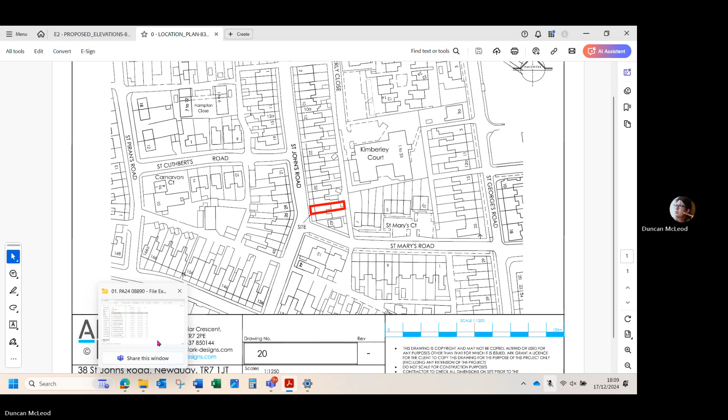We've done all this because it wasn't that long ago they added a huge big extension on the back, which would overlook the whole terrace, but we are really worried about the outside spaces and the impact.

Anything else? So what I'm going to do now is propose to close public questions and ask Duncan to present on this. I'll propose the close of public question. Show of hands to close public question.

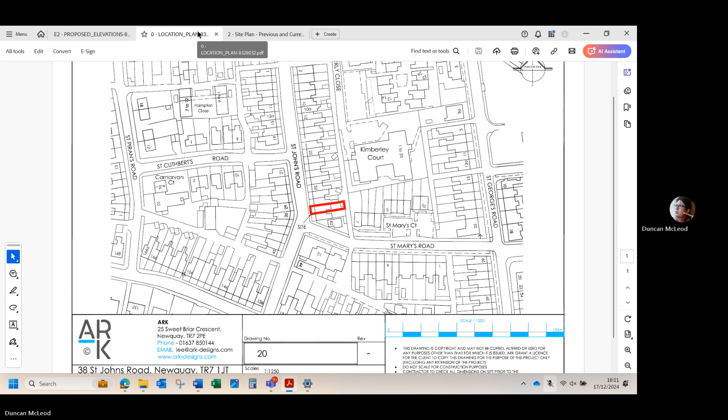So this is a new consultation. We'll start off with the location plan, showing the application site and proximity to neighbouring properties, including St Mary's Court and Kimberley Court.

When we're being reconsulted, we always ask ourselves what has changed. Firstly, whilst this is still a householder application, the applicant has changed to reflect the commercial nature of the property, so this is a company making the application rather than an individual as it was last time. Secondly, the description has been updated to better reflect the works applied for - it's much longer this time because there were more elements than referenced previously. Thirdly, the works to the rear of the property, where most of this is taking place, have been reduced to match the existing building line. We'll see from the plans that the works extended out into the back garden, but they aren't doing that to the same extent now.

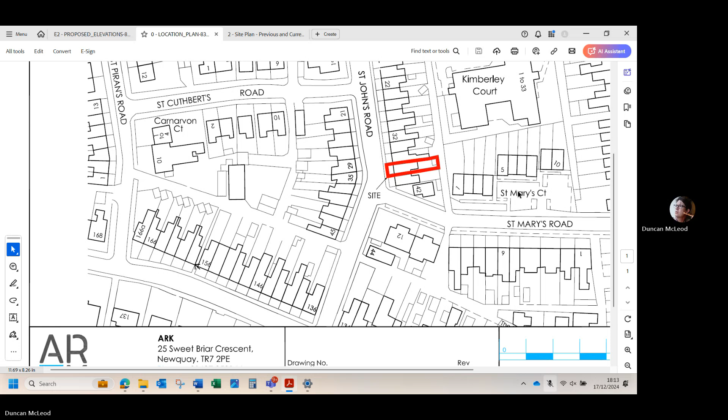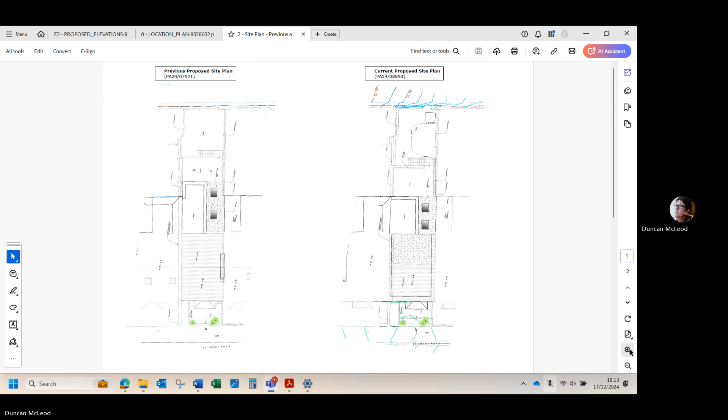I've put together a site plan of the previous application and the current one. What I want to focus on is this area here. You'll see that previously the extensions went out beyond this blue building line. Now they are not doing that.

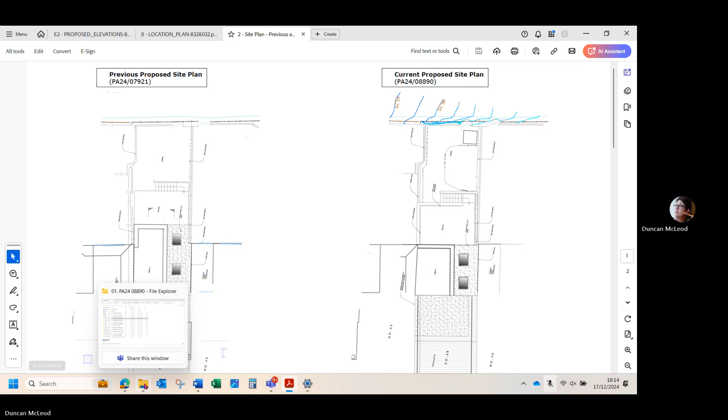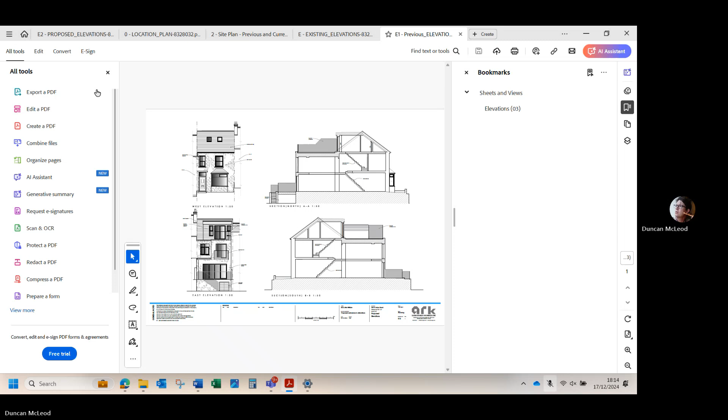We'll have a look at the elevations next. It's really the rear elevation that we're interested in. So that's the existing rear of the property, the east elevation.

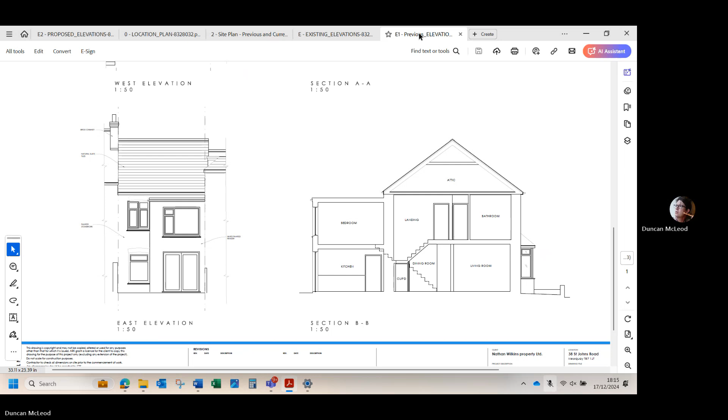Hopefully you can see that there is already an extension to the rear of the property that sticks out, which matches the building line. Previously, we were looking at the dormer at the top, the Juliet balcony, and an extension at the bottom there, which is all coming out beyond the building line.

Let's make that a little larger and focus on that rear. What we can see is that the ground floor rear extension has been extended to the full width of the building. Previously it didn't quite go all the way, and now it is. This is the rear ground floor infill extension element of the application.

At first floor, it looks like they've added about 0.5 meters to the width of this rear extension, but when I compared it with the drawings, it's just been poorly drawn, so it is just the same as before. The Juliet balcony remains unchanged.

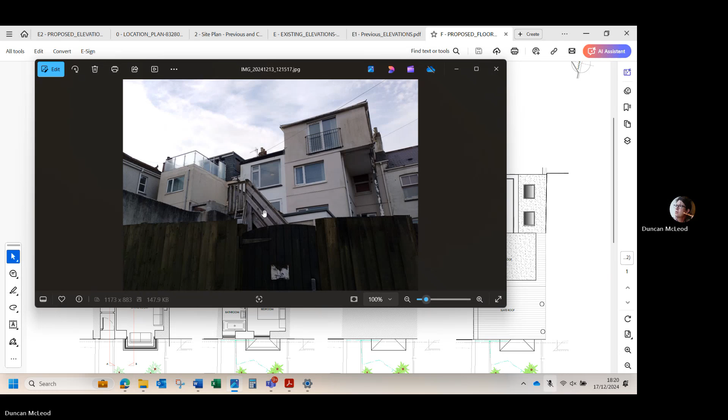Right, so there's a modest extension to this raised decking area, but that does already exist. And if I show you that photograph again, you can see this wooden structure is the steps up to what is a raised decking area. It is going to be slightly larger, but it does already exist out the back.

And you've got the infill extension, which now goes the full way across, creating a kitchen at ground floor level.

The addition of the Juliet balcony is probably the main change to the existing property at the moment. So again, let's refer to that photograph - you're looking at a Juliet balcony on this window here, and it's quite a large window at the moment already, but that will become a Juliet balcony.

This dormer, the newly created dormer, is referred to as an attic room, and this opens onto the new roof terrace that's created on top of the existing flat roof.

Yeah, I mean that's the application. It's not protruding as far out as it did last time, so it is a reduced application.

Can I ask you a question before I talk to my colleagues? Because this is actually an employment site now, we're now saying it's a business. Is that right?

Yeah, it would appear to be, and so we have policies around parking, don't we? It's our policy E2, which is new employment and training space, and our bottom line is that we encourage and applaud extra commercial sites, but it's a requirement that they do not adversely impact on the landscape or existing residential amenity. So the decision here is whether this is going to affect residential amenity, and there's a requirement to provide adequate off-street parking in accordance with the travel plan guidance, whatever that is now.

So are they providing any parking? There is no parking changes to this application - they'd just be looking at the on-street parking.

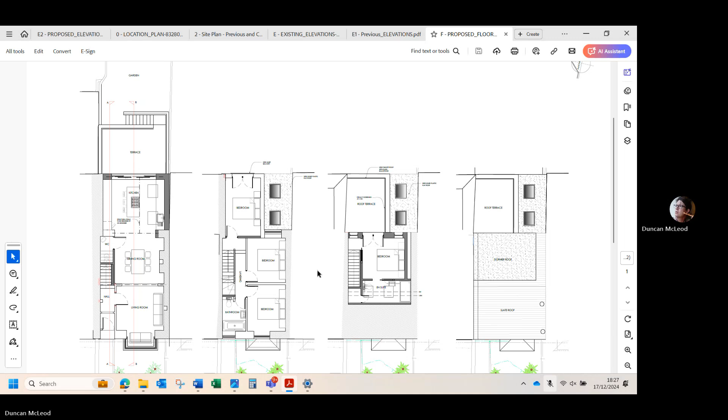Would we have a problem if they were not a business? It's because we know it's being used as one. I think it is because it's a precedent. They've sort of missed the boat, because putting something up means they're going to be losing their privacy. But they haven't got screening or anything - they've just got a waist-high balustrade going around it, looking at that photograph.

I am quite happy to raise an objection on this. I'm happy to propose an objection. I think the relevant policy is E2 - it's all about affecting the amenity of the neighbour.

If the officer came back and said because it's a C3 umbrella it's got to be H1, that's more difficult. But we are also saying it's going to affect the amenity of that terrace. Yeah, but our main problem is really the fact that we know that balcony is going to be used by people on holiday having a good time - and I don't mind people on holiday having a good time, that's what we're well known for. But it's a problem when it affects your neighbours' amenities in a residential area.

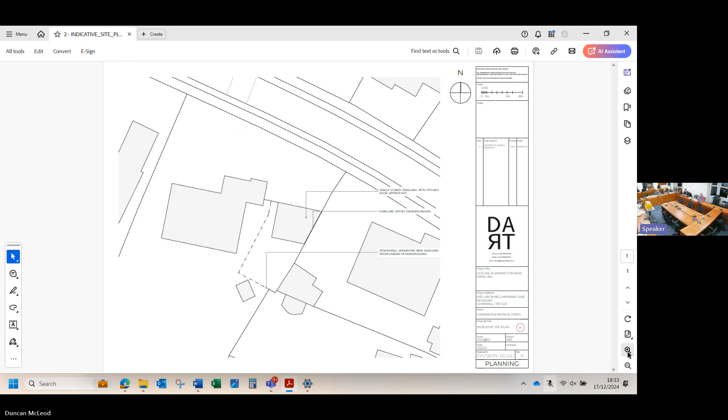It is intended that the detailed design at reserved matter stage will reflect the local architectural character of this lane, incorporating materials and building forms that complement the surrounding area. A high standard of design is a key principle of this proposal, with careful attention to detail at reserved matter stage to ensure that the development enhances the local built environment. To date, we have received no objections from either the public or consultees, and we would greatly appreciate the Town Council's support for this application. Thank you for your time and consideration.

Thank you. Has anybody got any questions they want to ask? My one question would be, is this now going to be one big house for a single family, or is it going to be 2 houses? It's not going to be 9. No, so I was just making the point that previously 9 apartments had been consented on the site, but the applicants don't feel that's appropriate to approach that previous scheme. So the plan would be to keep the existing house as subdivided at the moment and to create a dwelling in place of the garage, which is likely to be for the applicants. How is the house subdivided at the moment? The ground floor is 1 unit and then there's 3 above. 3 above? That's right, isn't it? 3 above, yeah, 2 on the middle floor and 1 on the top floor. Right, so you've got 4 flats in the building, and this is to build another one to make 5. Yeah, in total for the site.

What sort of... I don't know if it's appropriate to talk about parking yet, Duncan, if we're only doing in principle — can we fit another building? So we're just looking, literally, at whether we think you can fit another house in where the garage is. Yes. Yes, Sarah? Yeah, is it going to be shared access then? I note from your existing dropped curb and the red outline that you've got for the property.

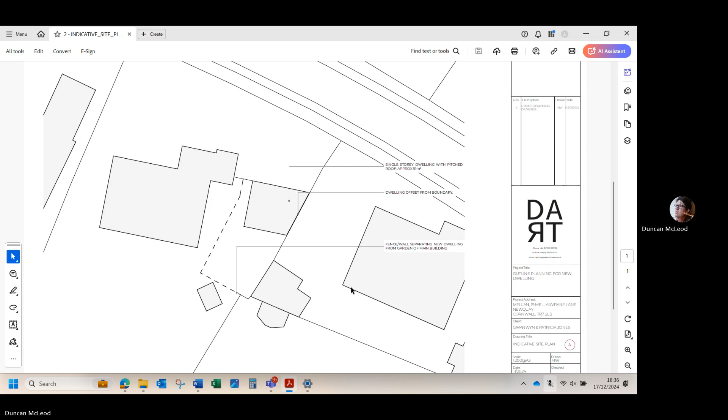Have we got a distance from that? Is that what it looks like now? Yeah, that's what it is. What is that distance from? I don't know what that distance is. There isn't - you don't know?

Perhaps you can just explain what we're looking at now. Yeah, so there's been an indicative site plan submitted with the application, which shows roughly the footprint. The footprint would be really not much larger than the current garage with the lean-to extension.

This is the indicative plan. So this shows here you have a boundary treatment - fence stroke wall - separating the new dwelling from the garden of the main building, and you have the indicative footprint of what at the moment we are talking about, a single-story dwelling with pitched roof.

And to the right of the picture is the next door neighbour, I take it. On the right is the next door neighbour, so this property here. What is in the corner? Go back to that site plan. What's that funny shaped building? Move your cursor a bit. Yeah, so that's the neighbour's garage, which is a lot higher level.

And there's a current application in the system at the moment for extending that for a holiday unit. But is that, yeah, higher level. And I think you've raised no objection to that one, so, yeah.

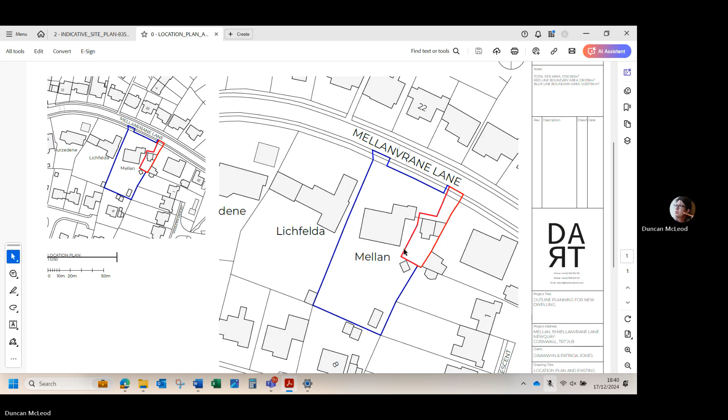And I think we've already briefly seen where the boundary treatment will go - it is pretty much following this red line, okay, the indicative block plan. Just make that a bit larger. Yeah, you can see, so that's the footprint that you've got at the moment, and the indicative is a very similar footprint, yeah? Can you just do that again?

Looking at the existing footprint of the garage at the moment, of the outbuildings that are there, and that's the indicative block plan. But as I say, that would be further clarified at the reserved matters stage. So the next application that we would see, should this one be approved.

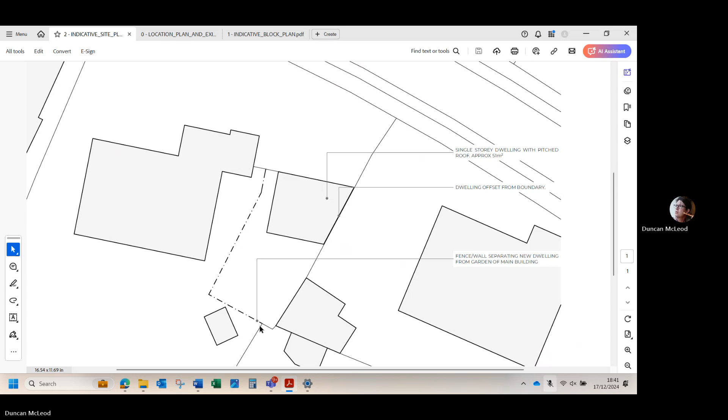The indicative site plan, as I say, we've just discussed this, and the boundary treatment that we're looking at there, and this isn't just about the principle of development. This is also about access. So we have an access plan here.

But I think we could see from the street view what would happen. The existing drop curb site would be used for the access. There is a large area in front of this overall property that could accommodate, I don't know how many cars altogether, but it would seem that the access is existing.

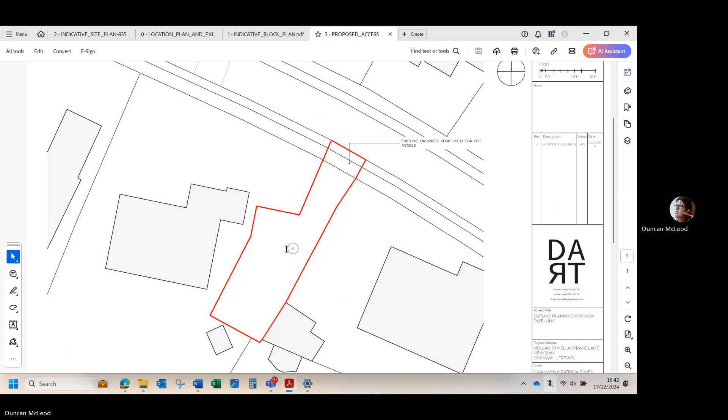The only thing I can think of is that the plan of the dwelling comes right up to the boundary. Unless I'm reading that wrong, have I got that right? So the access on the side of the property is going to be problematic. If there was a small gap, then it might be a little bit easier. I would just say that it would appear that the current buildings there are built right up to that boundary as well.

So they've got access from the other side, so it's not a ransom. I know what you're saying, and that's probably something that would come up in the reserved matters. That's the kind of detail that we've been looking at in the reserved matters at the moment. It's really the principle of developing that site, and the only matter not reserved is the access.

Does anybody have any problems with this? Because normally as long as we think there's room for a house, we normally just go no objection and wait for the next issue. So I'm going to propose no objection, and we'll wait with interest to see what happens next. Thank you very much. Who was your seconder? Second, right.

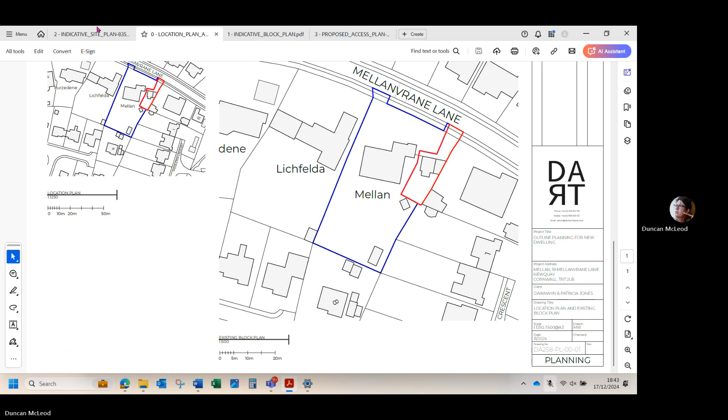Oh, yeah. You're very sparkly.

Good evening, councillors. I'm Lisa Solly from Situate Plan Consultancy, and I'm here representing and introducing Peter Cowling of Trebelzue Farm. Peter's farm hosts the Boardmasters Festival every year, and so while you may be familiar with the name and the applications in respect to the festival, I thought it might be helpful for you to meet Pete and put a face to the name.

Pete's family first tenanted the farm in 1933 and have owned it since 1956. As well as the farm, Pete owns Cowling Plant Hire, which was started by his father and has been run from the farm for about 40 years, utilising buildings and spaces when not in use for agriculture at given times of the year. The farm and plant hire employ about 10 people, with additional employees on the farm in the summer months. The current application, PA 240961, seeks retrospective use of the land for the plant hire business and a scaffolding yard.

It also seeks to regularise the appearance and use of existing buildings for the plant hire company, as well as commercial storage and ancillary storage for the annual festival. Permission has not been sought or applied for Cowling Plant Hire over the 40 years that it has been operating, and while a certificate of lawfulness could be applied for, it made sense to regularise everything in one full application, as the other uses represent further farm diversification that helps to support the farm.

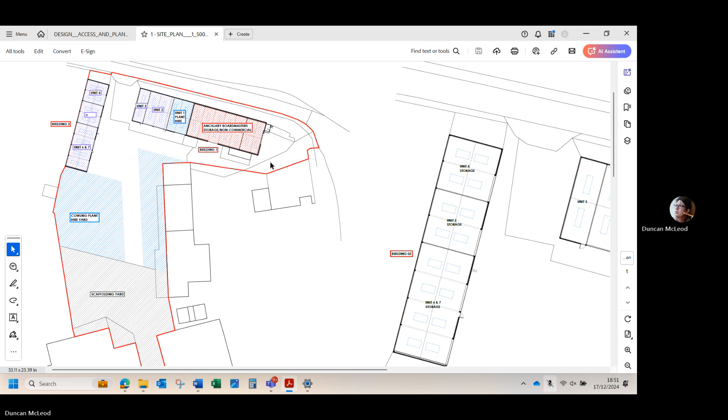Really, not too much to look at here. In terms of the comments, both the Ramblers and the Public Right-of-Way team have raised no objection. The Public Right-of-Way team have put forward a number of points as an advisory note, but these may well become conditions on any permission granted, and obviously they want to keep the public right-of-way open and usable.

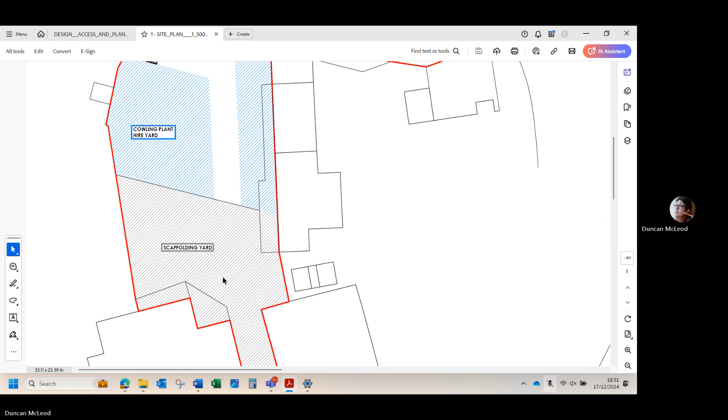I think we've established most of the key points of this. We see the layout of the buildings—you've got the scaffolding yard, which itself doesn't have any permanent buildings. We have the plant hire yard and the storage units: Unit 1 is for Cowling Plant Hire, Units 2 to 7, shown in blue, are commercial storage, and then, as established, the ancillary Boardmasters storage, which is a non-commercial unit.

Anybody got any concerns with this one? I'm delighted to see that the buildings are being put to such use, and you've made all these improvements. And because it's retrospective, I'll propose no objection.

That's what we normally do with retrospective applications, because we usually like to have them in advance. Is there a seconder for no objection? Sarah, show of hands.

Thank you for coming in, and it was very nice to see a face to go with the name. I'd really take heed of those conditions they've got on there, like with gates and everything.

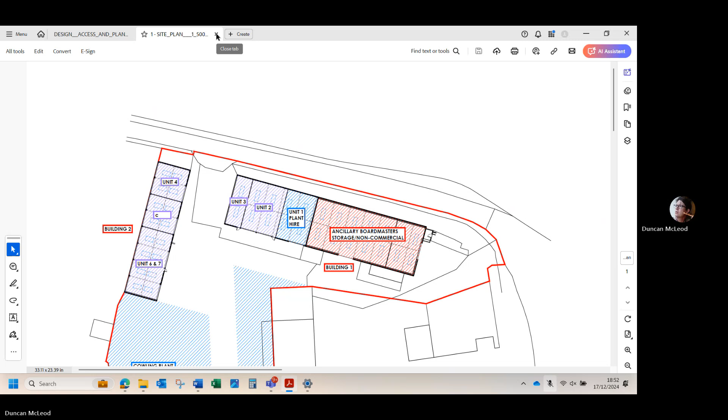Yeah, we'll do, because I think the public right-of-way is the road to the north. I'm looking at the Cornwall Council interactive map, which shows the right-of-way going through the middle of your farm, but they're very clear on those. It will be enforced, so I would pay close heed to that, because it's obviously somebody's radar, they're going to come up and check.

I'll say that we're supportive of those, if you're happy with that. You've already got wind power, I know.

Is there any opportunity to put solar panels on any of this stuff, is what we normally say. But it's not really associated with a change if you retrofit. Turbines - yeah, I remember the turbines coming through.

Okay, thank you very much. I think you've got enough, have you, Duncan? Yes, we'll be supportive of the public right-of-way team comments, and we'll reference policy on encouraging green energy production. Okay, thank you. Thank you. And you, we'll see you here. Yeah, no doubt. Take care. Bye, take care.

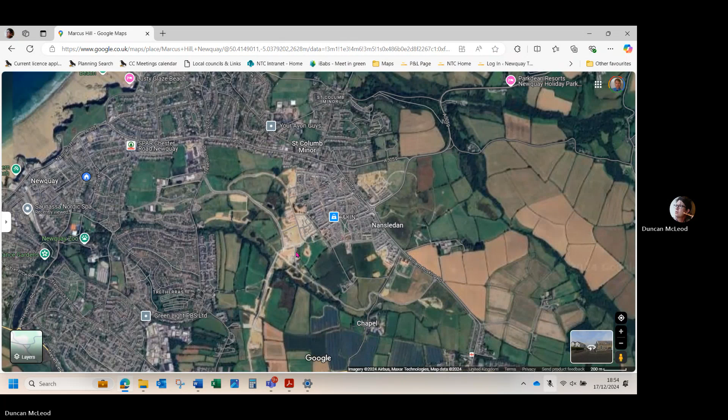I still have huge concerns with this. This is going to be a major routeway with that island, which is outside the Methodist Centre, which is a real pinch point. So where's that? In terms of the map, where is that?

Well, let's start with my comments, because what I did was I looked at - I don't know if everyone's had an opportunity to see what I sent round. It went through the wee small hours of this morning, and then I went and looked at it again and corrected all the spellings of Stret Euther Pendragon I'd managed to put in there. But effectively, hopefully we all know it's a big Y shape.

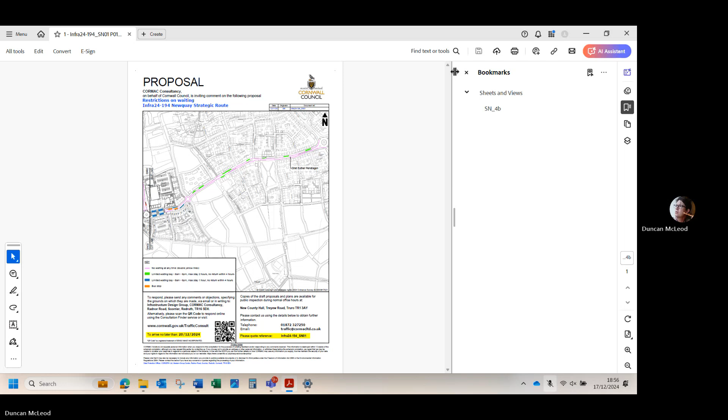Which is the east Y thing, and it's the bit that's already developed. Here we go, can you blow that up a bit? Found that was less than 66%. There we go, here we go. Is that okay? So effectively, that was, or is currently, free parking, and now they're recommending -

Because I assume it's the route coming from the strategic route, it's 20 mph, and we're not doing speeds at the moment, so forget the speeds for now, but this is just restricted parking. And one of the comments I make is, why is it all on the same side of the road?

Have you got the point? Have you got a pointer there? Have you got the pointer, Duncan? Is your bit that you're worried about? Yeah, it's this bit with the island there.

Thank you. So, at the moment, is it possible to blow it up even more? It is. Please, Duncan.

The purple denotes no waiting at any times, that's double yellow lines, and the green is limited waiting bays. At the moment, there's the island outside the Methodist Centre, with an inset bay, and currently we've got cars parked in. These are all shops on this side, and that's completely inadequate parking for this row of shops.

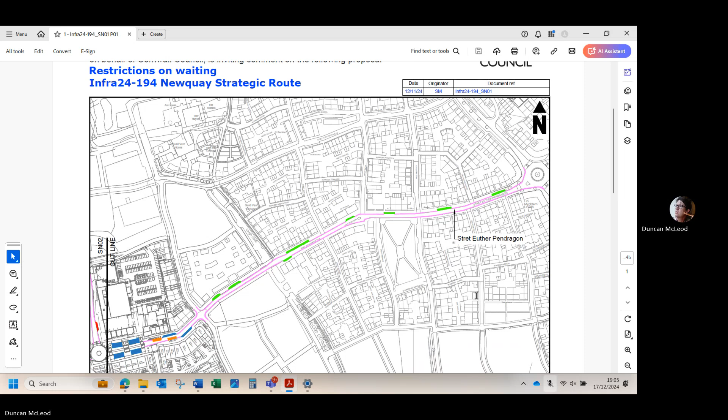What I've noticed in streets where parking bays are on different sides is it introduces traffic control, whereas here the people on the left-hand side coming out are going to have it. These parking bays already exist there, they're already built in. So the only thing changing is that on-street parking is being made mandatory - you have to park in a bay and not on the street, and they're putting a maximum time figure on it.

What do you think? I think traffic up there is a nightmare. I think sighting, being able to see what's coming around corners, is awful, considering it's supposed to be a place where you're encouraged to walk.

I know the intention was to get residents to park in places kind of near their home, but not necessarily directly next to it. Some people don't like that because of the traffic, and if you've got kids, shopping, and it's raining, it's complicated. But I agree with that bollard in the middle, because my kids used to go to one of the things near there, and it was just a nightmare.

I do think that if they want... From what I've heard of Joe's views, what do you think?

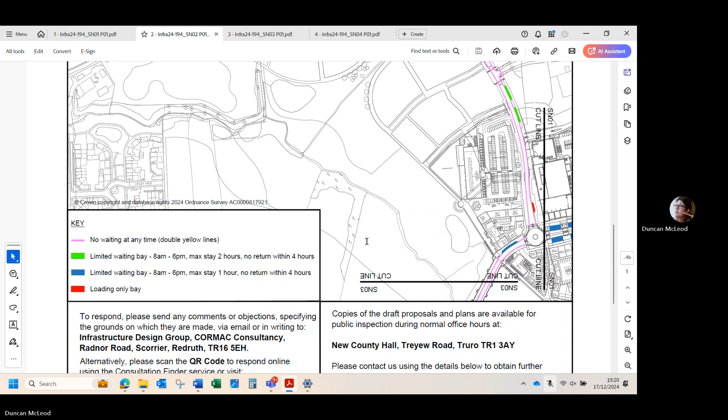That's no parking, that's a loading bay. So obviously that's going to be associated with a commercial enterprise that they are looking to fit in there, I would suggest.

Say that you would like the green parking bays to be 3 hours instead of 2. Yes.

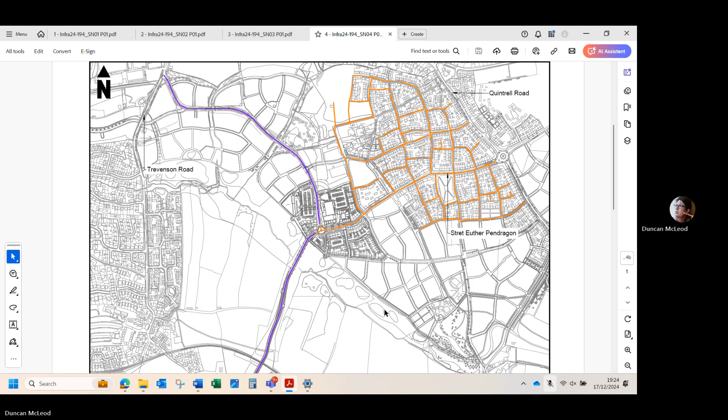And you're happy to put what we've said? I'll do that, I've got until Friday to do that, so I'll be able to unpick it. I just need a proposer and a seconder that we will return these comments that we've raised. Show of hands, yep. There might be a few contradictory ones in there, but I'm sure you can sort it out.

Okay, do we have any other consultations? Maybe, well, not live ones, but with the Mid Cornwall Metro active travel phase 1, we've had a response from Cormac.

Yeah, you resolved to object to that. This was the narrowing of Narrowcliff. And I think so, yeah, so they provided a response, which, as Joanne said, it's like thank you, but no thank you, and then they've subsequently provided correspondence giving notice that they will be starting work on narrowing Narrowcliff very soon. So that's just an update.

Right, anything have I jumped past? Have we got any licensing applications? We have got a licensing application, we've got a variation. Can you take us through it, please? Yeah, sure, just let me get rid of this slot.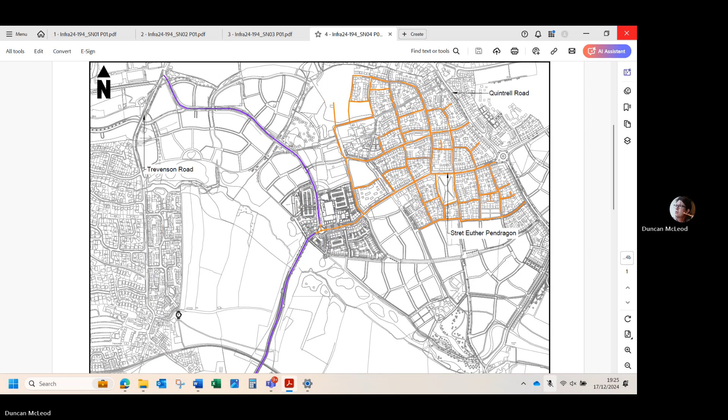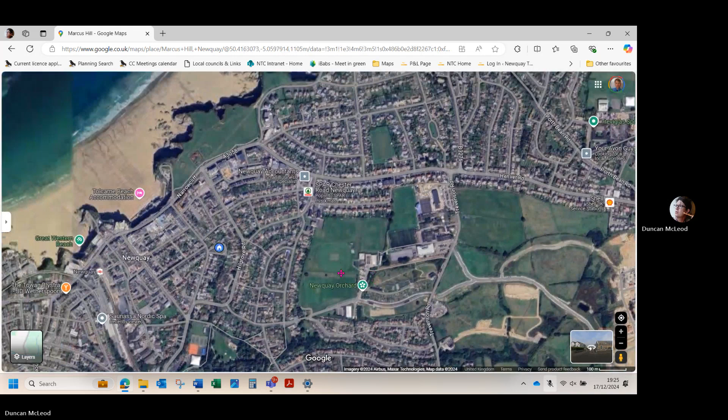One more planning application. I've got Tom - oh no, right, sorry, I'll just find the premises in question. Where are we? We're down here a bit, aren't... Okay, that's not working, is it? Right.

Who put that lamppost there? Honestly, right, so we're looking at Tom Thumb, okay, the Tom Thumb cocktail bar. Funnily enough, I was still working for Cornwall Council when one of my colleagues licensed this one for the first time. So this is a variation to an existing license. We wish to apply for a later license for the bar to serve alcohol. They would also like to add films to their list of permitted activities.

They are currently allowed to have live music in there under the Live Music Act. That's not actually on the license, but a change in the law meant that they were small enough to be able to have live music in there till 11 p.m. They wish to extend that hour.

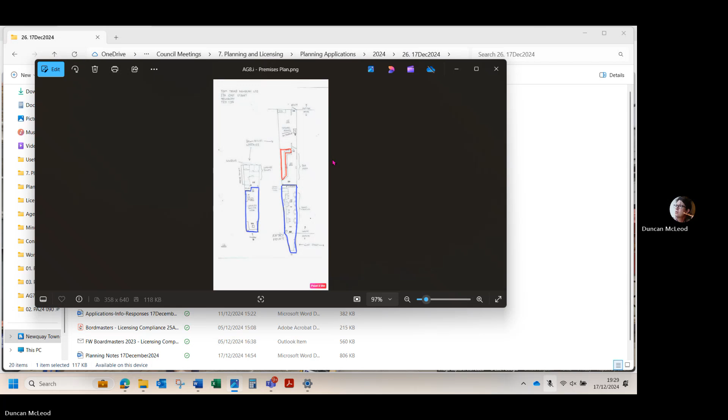Let me just show you this. So on the right, as you're looking at it, is the ground floor, and this is the front here. This is the front, and this is East Street, and this is the outdoor area.

They are looking to license this area. As I say, they can do live music within the premises anyway at the moment, but they are looking to add a little bit more time to that, and that would be live music there. That would be live music there, and the red area there, that is the bar, where alcohol is purchased.

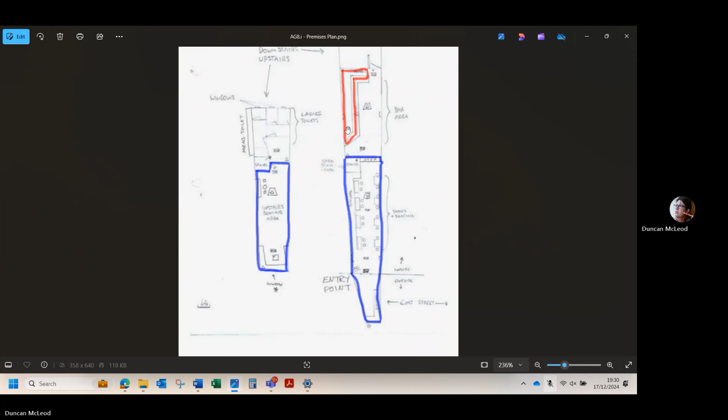They have an outdoor area, which they are talking about projecting films onto the back of the building. I did raise the point with them that that's not even shown on the plans. But licensing seem to be quite happy with the plans that they've received.

And this isn't the first time we've sort of seen this. There's no brown line showing the premises boundary at the moment. So they're saying they're not intending to go outside onto the street, they're only going back to this private space at the back of the venue.

That's for the film. It doesn't say outside specifically, it just says both. That concerns me as well, because I don't think they should be showing films and things at the front there. I think it would be a big distraction for drivers and for people coming.

Could I just say, if we were to show films in the summer, it will be in the upstairs room, or projected onto an internal wall inside the bar, or on the outside wall at the back of the bar garden.

Can we make that a condition? That is a private space at the back of the venue with limited space and accessibility, making it a ticketed event. I've already asked them about this, and they haven't really come back with a satisfactory answer, because effectively what they're asking for is much broader. But if we condition it to be at the back, it'd be more acceptable.

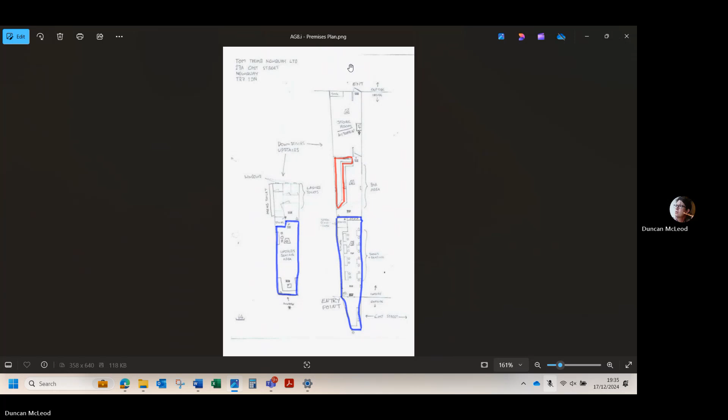Right, can we move on? So do we have any previous planning? You've got no 5-day protocols to ratify, but you have got one sitting in your inbox which I need a response to. You have responded and Joanna's responded.

I do need responses to that by Friday. So if you look at it - I can't remember what it was on. Oh, we disagreed, didn't we?

No, I was wondering whether I change on it. Well, I think they haven't shown us - they're not. No, it's the one with the very awkward build that we looked at a couple of weeks ago. And they're coming in with certain changes, but they aren't actually commenting on what we objected to. So I want to maintain our objection on that until they come back with a better design, but you may not agree with me.

Sarah's now thinking about it. Well, I just didn't like it at all. Yeah, in that case, right, if we carry on with that one - please note, if you could respond to Duncan by the end of the week, that would be good.

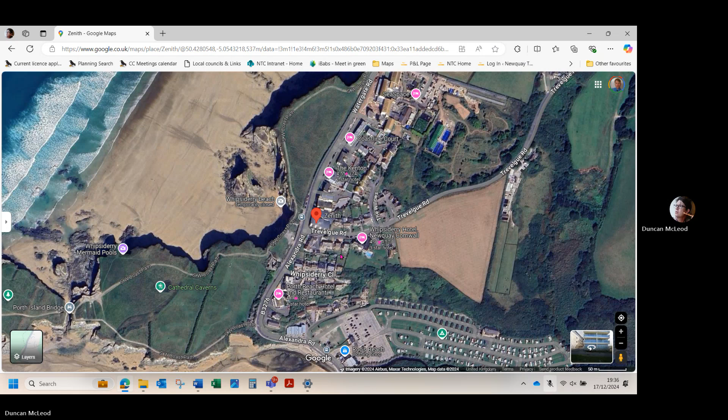Right, we have one planning application left, I would take it. Two, but they're both certificates - oh yeah, I thought certificate of lawful existing use and development. They're both quite straightforward. The first one is PA 2409174, and this is Zenith, the block of flats, or sorry, apartments.

When I first started in this role, we saw a few applications for this building having its holiday-use-only condition removed. We've not seen one for a long time, but that's exactly what Flat 7 wants to do.

Granting a lawful - basically they're saying that they have been using it. They were granted permission for it to be a main residence. And I think enforcement aren't convinced that the people ever did use it.

Now, as you know, a planning application has a time limit on it - 3 years. You have to act upon it within 3 years, or otherwise it lapses. I think enforcement are saying to them, you have to show us that this has been your main residence, otherwise it's still holiday use only.